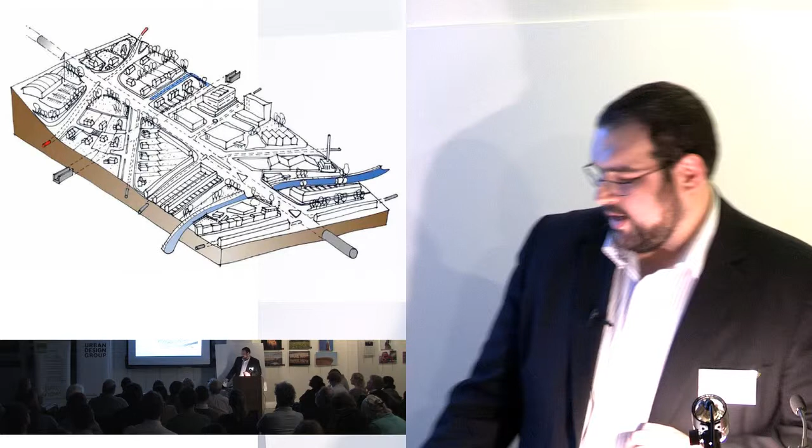So this is our current environment that we think we've got, and this is what we'd like to happen. You can see the impact that hopefully green infrastructure will make.

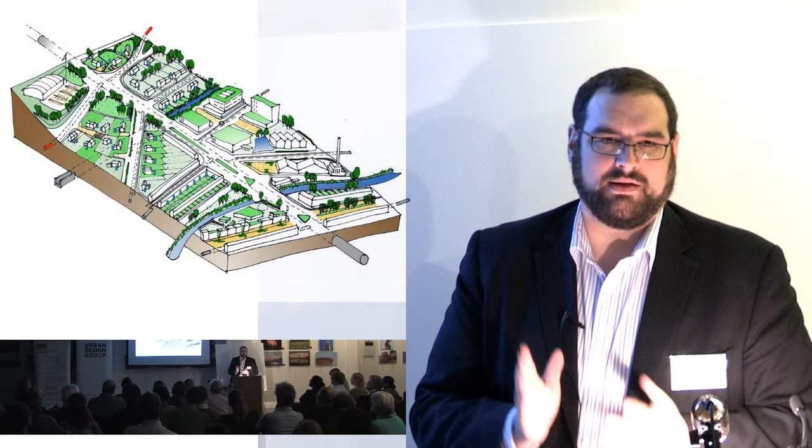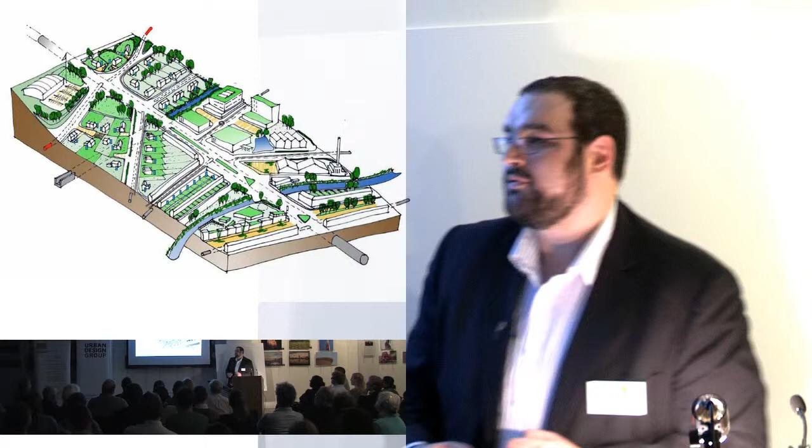I know it's after work, I know some of you had a drink, but can anyone suggest what retrofit green infrastructure approaches have been taken here? Before and after, I feel like an optician. Roof garden - but what have we done? We've got green roofs. Soils made it more permeable. We've opened up the waterways.

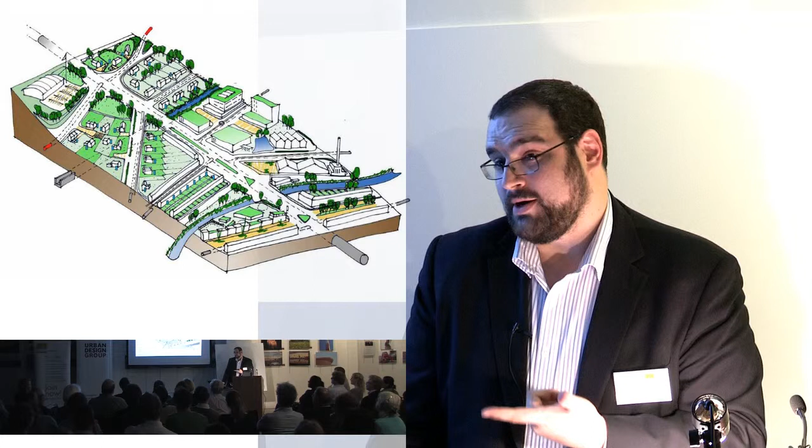Shall I put you out of your misery and say what could be done? So, looking at the roofs, we've thought about possibly disconnecting downpipes, maybe retrofitting a green roof.

In terms of courtyards and terraces, we looked at the opportunities for infiltration and storage. Can we use that area for rainwater harvesting tanks? Can we also think about other more hard landscaping opportunities in terms of rills and channels?

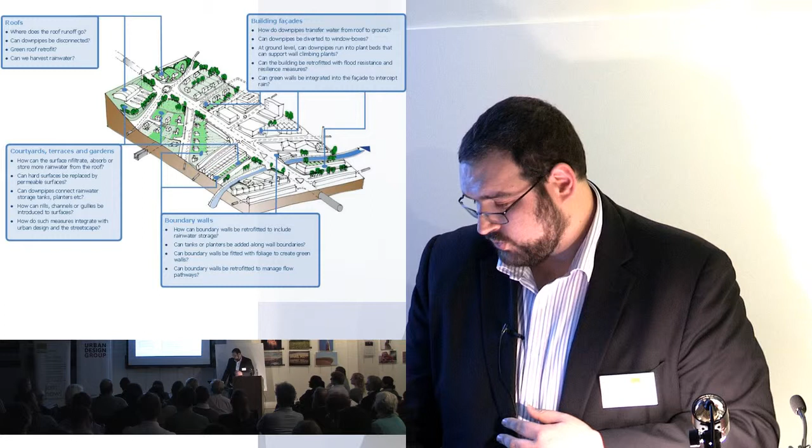And looking at building facades, we're again looking at opportunities for planters, disconnection of downpipes, and maybe green walls because they have an impact. And also maybe the smart use of boundary walls, an opportunity to store some of that water. So looking at the bigger picture in terms of the streetscape, what can we do there?

The highways is one of the biggest contributors to diffuse water pollution. So again, what we'd like to be able to do is reduce the imperviousness of that. So there's opportunities there for maybe rain gardens or vegetated chicanes.

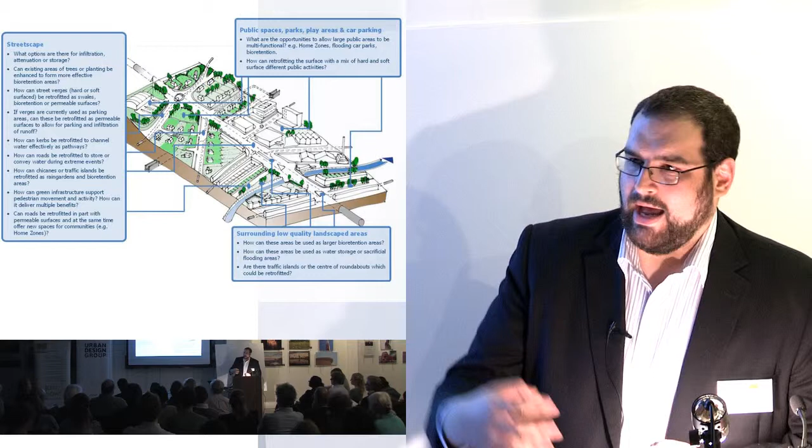And also looking at opportunities for using verges more imaginatively and converting some of the tarmac paved areas into areas of grass that enable water to flow down. So what we're looking to do is really capitalise on the environment that we've got to take things forward.

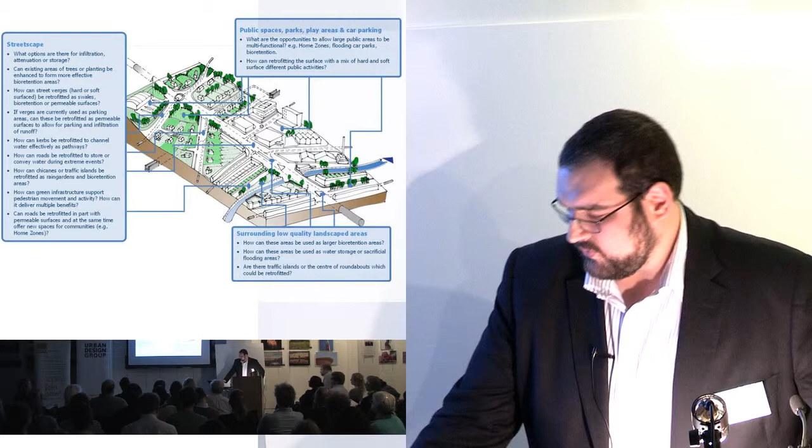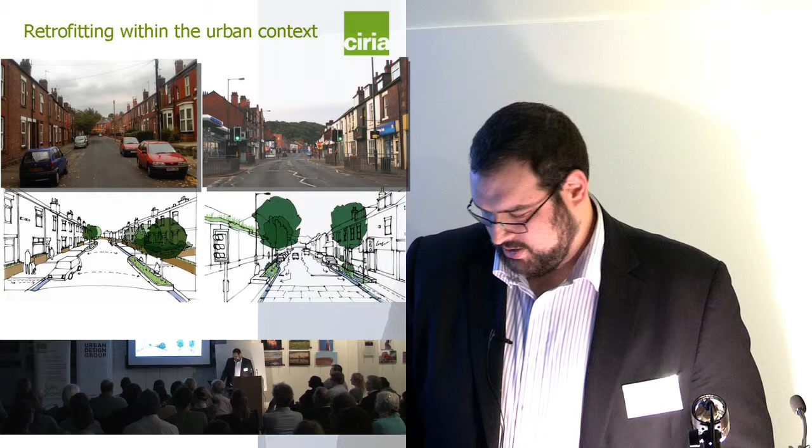So delivering the benefits, we've got the traditional approach, which is about seeing water as a challenge. Back in the 1850s, there was an awful lot of concern about the impact of sanitation and hygiene, so the approach was to get water away from the city as quickly as possible.

More recently, within the last maybe 15 to 20 years, we've talked about sustainable drainage systems where we're looking at opportunities to manage the flows and volumes, the quantity, looking at the quality aspects, and amenity and biodiversity. It'd be fair to say that engineering-wise, it's a lot easier to manage and engineer systems to deal with the quantity aspects in terms of flows and volumes. It's less easy to look at that in terms of water quality and particularly in terms of amenity and biodiversity, but we are getting there.

So we're looking at ecosystem services, the opportunities that we get from our environment in terms of looking at the opportunities to regulate flood risk, urban heat island effects, and also providing cultural and societal benefits. I know that will be talked about a little bit later. And we're looking at the opportunities for green infrastructure and the fact that delivering green space with a high level of biodiversity starts spinning off all those other benefits.

And then what we're trying to do is also, when we go forward, look at the benefits that are provided by water-sensitive urban design, which is all about the integration of the water cycle and the built environment, and Louise will talk about that a little bit later on.

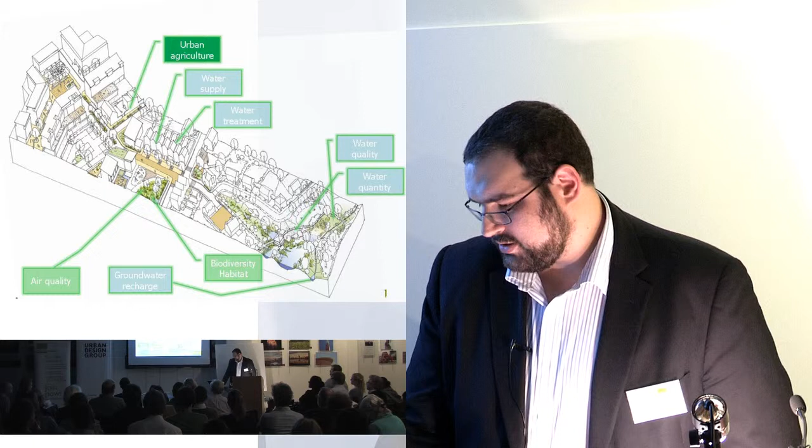So looking at what's happened in the States, Philadelphia has an issue with regards to its rate of growth and its issues with regards to combined sewer overflows into its watercourses.

They looked at the opportunities for using a grey infrastructure approach and found out it's prohibitively costly, so they started throwing around some ideas. And what they came up with is a mixture, a hybrid system of taking 50% of the area and putting that through grey infrastructure.

So when they started looking at the net present value in terms of the benefits, they realised that a green infrastructure approach provided 2.8 billion of benefits as opposed to 122 million. So they've looked at all the benefits that come around with regards to green infrastructure related to reducing the urban heat island effect and also the opportunities for improving property.

So what's the difference there between the UK and here? They have a mayor that is a champion, a leader. He wants to make Philadelphia the greenest city in America. He has an unfortunate name of being called Mayor Nutter, but compared to our mayor, who is the most sane... but in fairness, I've only done that for effect to make sure you remember Mayor Nutter.